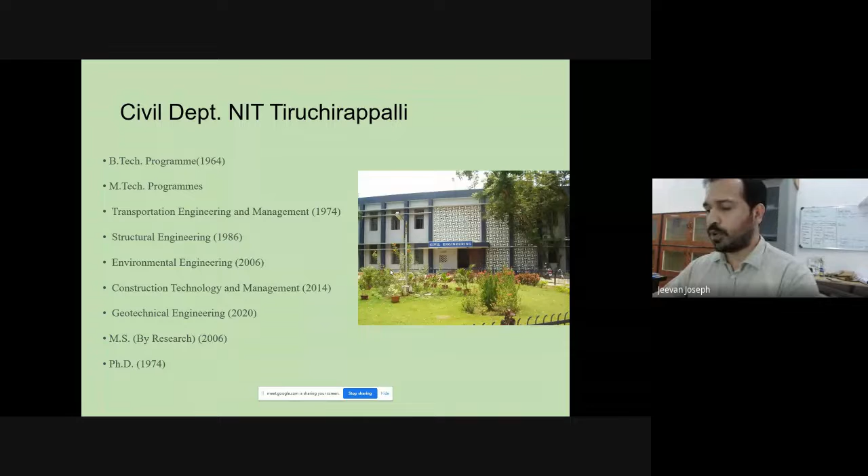Now, these are the research interests in which I work on these days. One is basically related to THMC models, thermo-hydro-chemico-mechanical models, and the response of soils. Apart from that, I also started working in the area of utilization and valorization of industrial byproducts. A couple of my master students are working in this domain. One of my students is working on developing sensors for geotechnical applications, particularly related to shrinkage stress measurements. The experiments are ongoing as of now, so mostly we'll be able to get some positive results out of that. Apart from that, I had worked on the area of energy geotechnics, but right now I am keeping a bit of distance.

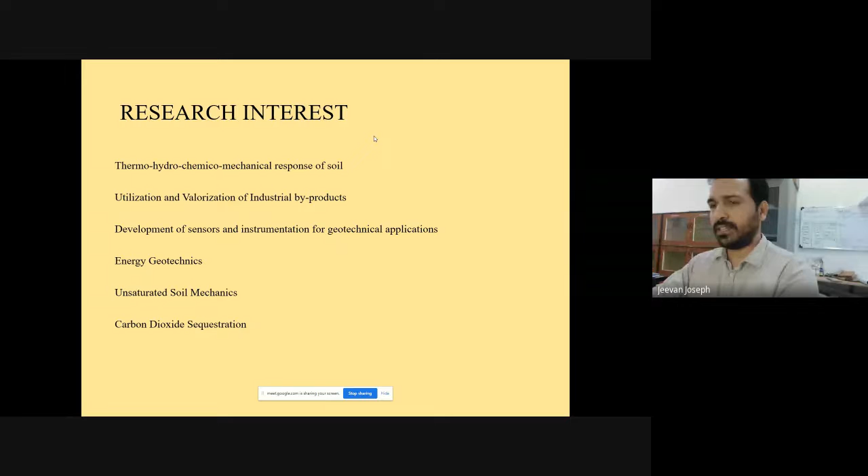Because a lot of funding is required to proceed with research in this particular area. So maybe in future, if I get some funding from some agencies, I'll be able to proceed with it. Apart from that, one of my students is working in the area of unsaturated soil mechanics. He's doing his PhD in this domain, trying to understand the rainwater infiltration in clay soils and how we can increase the infiltration capacity with novel methods. Apart from this, I started investing a few of my research themes into the carbon dioxide sequestration technique, which has also been found to be one of the emerging areas in which people work on.

Now, without wasting much time, I just want to give you a brief introduction about why exactly the gas transport through soil or any porous media is important for us. So when the term gas transport through any porous media comes, it is of course read along with the permeability aspect of the soil. As all of us know, the moment we try to define permeability, it is nothing other than the easiness with which any fluid can flow through a porous medium, irrespective of liquids or gases.

We always define permeability in terms of the ease with which fluids can flow through a porous medium. If we want to look closer, we also define a term called hydraulic conductivity, wherein we are particularly defining the flow of liquids rather than fluids in general.

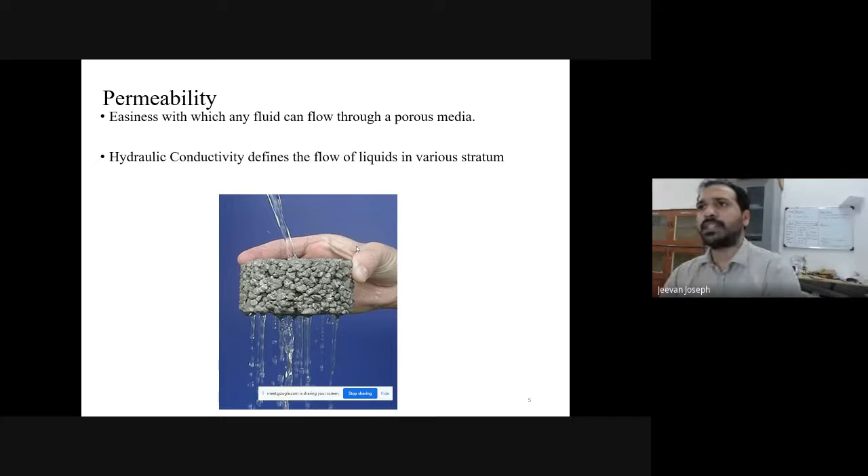In soil mechanics, we have plenty of applications related to determining hydraulic conductivity: the design of liner systems, earthen dam designs, geosynthetic clay liners, seepage analysis beneath dams. There are plenty of applications for determining hydraulic conductivity of porous media. There is also work being done on pervious concrete for pavements, so this area has many branches, but very little attention has been given to gas transport through porous media.

Now there is another interesting term, important to introduce, called intrinsic permeability. As we define it, there is a slight difference between the terms hydraulic conductivity and permeability.

When we denote the term permeability, it is basically a matrix property that one has to define. This relationship shows how we correlate hydraulic conductivity with permeability. Truly speaking, it's a function of the matrix property, or the intrinsic permeability term, denoted as small k. It is basically a function of the matrix property.

Followed by that, we have the fluid property, wherein we account for fluid density, acceleration due to gravity, and its dynamic viscosity. If you see as a whole, in laboratory conditions, what we normally measure, the hydraulic conductivity, is a function dependent upon both the matrix and the fluid character.

That is one reason why the unit for intrinsic permeability is given in meters squared, or L squared. If you take any soil matrix from the field and try to determine the hydraulic conductivity with water, with oil, or with some other fluid, you will realize that you get different coefficients of permeability.

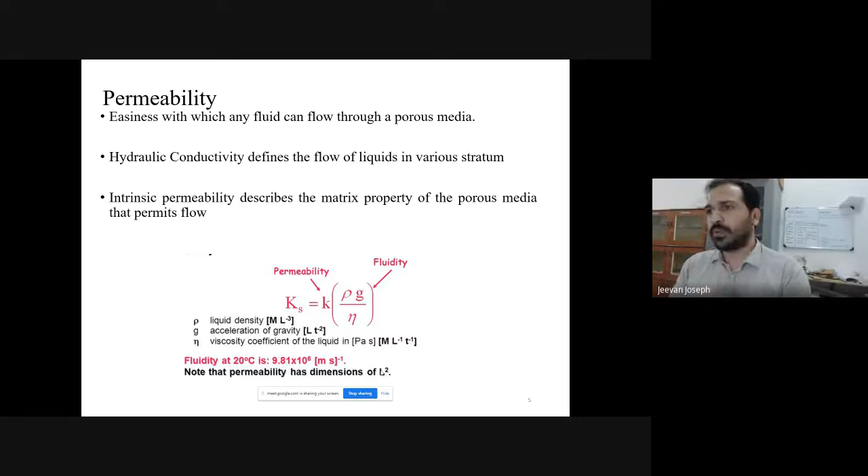That is why, when defining the property of any material, for example gravel, shale, various rock types, as well as soil types, we can define both its hydraulic conductivity and its intrinsic permeability. Normally we denote the unit of intrinsic permeability in Darcy, where one Darcy is somewhere close to 10 to the power of minus 12 meters squared.

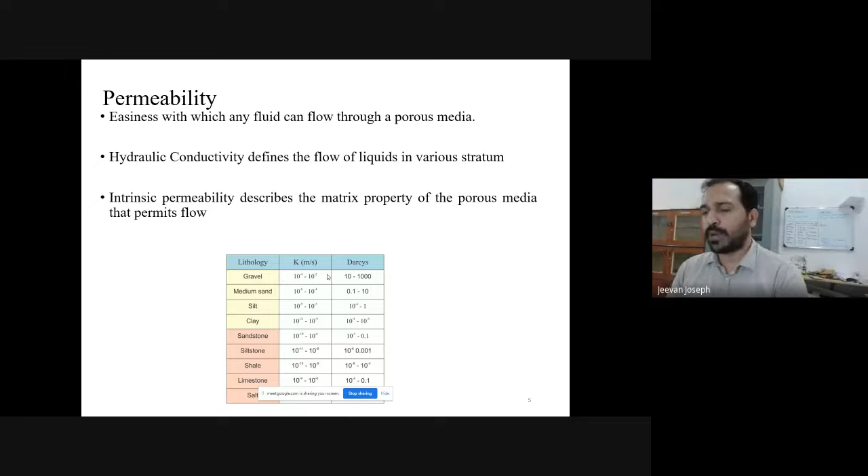The second column you see is a constant, because it is dependent upon the matrix property alone, whereas the first term in this column is dependent upon both the matrix property and fluid character. This is the basic difference between hydraulic conductivity and intrinsic permeability. This is important because whenever someone is defining the gas transport mechanism, we need to know how exactly we are going to measure it.

It is slightly different from how we measure hydraulic conductivity in the field, because the fluid which is going to flow is basically gases, which we are trying to do in the laboratory. In the coming slides, I will explain how exactly we can measure the gas permeability through a particular matrix.

At the same time, in order to evaluate them, we have the established relationship Kg, which is nothing other than the gas permeability or intrinsic gas permeability, which is basically Q mu L by delta PA. This is similar to the Darcy's equation used for hydraulic conductivity measurement, but here we have to compute the Q value, which is nothing other than the discharge.

Whenever a gas needs to flow, we have to make sure there is a pressure gradient, delta P, which is nothing other than the gas inlet pressure. Mu is the dynamic viscosity of the gas which is flowing. L is the length of the sample and A is the cross-sectional area. From this, we will be able to get the intrinsic gas permeability of the system. This is a derived formula from the Darcy's equation.

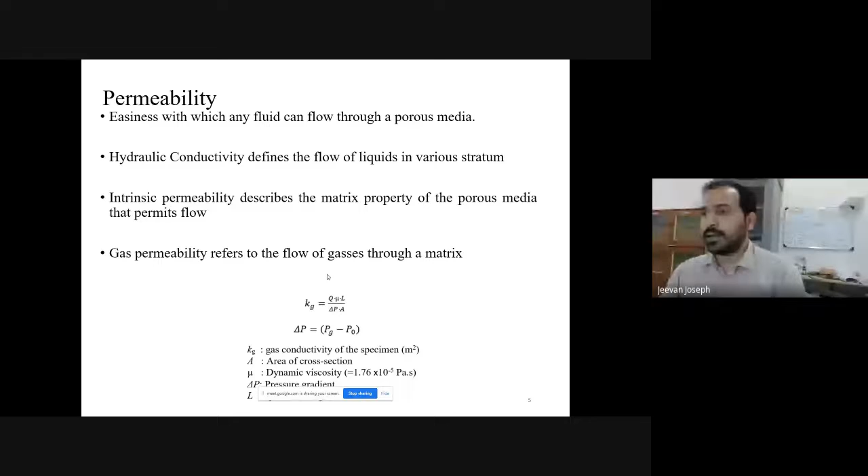As I have mentioned, here also we are particularly focusing on the intrinsic permeability, which is nothing other than the matrix property which has to be taken into account.

In hydraulic conductivity measurements, we mostly aim for a constant head test, because in conventional terms, in most of our laboratories we were following the constant or variable head permeability measurement techniques, in which we used to have a rigid wall through which we will be filling the soil, or maybe the soil brought from the field is transferred to this mold, and we used to perform the permeability test.

But one of the biggest disadvantages of this methodology is something called short circuiting, meaning, as I have clearly told you, permeability is nothing other than the easiness with which any fluid can flow. The fluid that you have taken for your study will always try to come through the least resistant path offered to it.

So in most of these cases, it has been noticed that the flow happens mostly through the peripheral sides, meaning the annular space which is available between the soil grain as well as the rigid wall which is present over there.

This effect will be more evident while attempting permeability studies with low porous media or lesser pervious systems like clay or silt, because the permeability value is pretty small for such materials. In such cases, if you attempt the permeability determination using a constant head or variable head method with a rigid wall cell, we can end up measuring values which are meaningless.

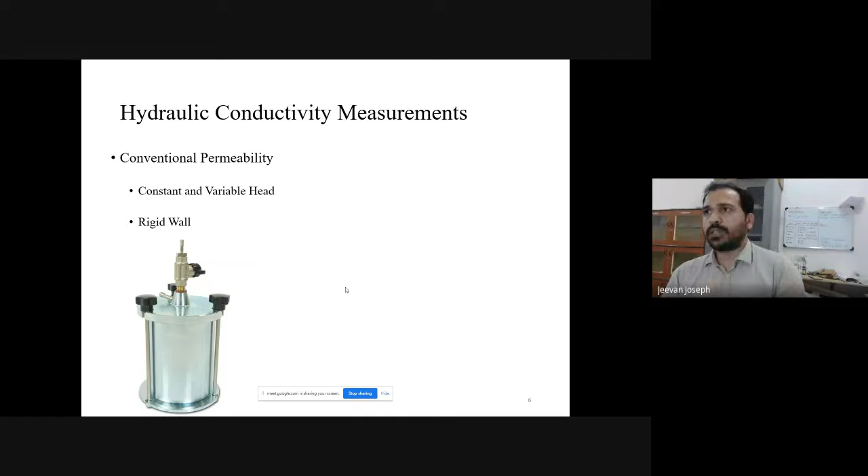So in order to cover that, most of you must be aware of this particular term called the flexi-wall permeameter. This is a device which will look similar to a triaxial cell. Unlike the conventional permeability mold, here we have a system in which we can apply confining pressures onto the soil sample which has been kept.

The sample that you prepare is similar to our triaxial sample of 38 mm diameter as well as 76 mm in height, which is prepared in rubber membranes. You can see the connections which have been provided for the fluid transport. The advantage we get is we can apply confining pressures.

At the same time, one of the biggest loopholes we have established in conventional permeability testing is that we won't be able to establish the saturation state. Majority of the time we assume the soil is saturated after continuously connecting it with a constant water head, maybe for 3 or 4 days. It was pretty difficult to make out the saturation state of the sample inside. That is one of the other disadvantages of going for a conventional permeability test, whereas here, we can vary the confining pressures.

At the same time, we can evaluate how much pressure is the pore water pressure that is getting generated inside the sample, and based on that, we can establish Skempton's pore pressure parameter B, and we will be able to know how much is the actual saturation state of the sample. So this is one of the advantages that we get while using a flexi-wall permeameter.

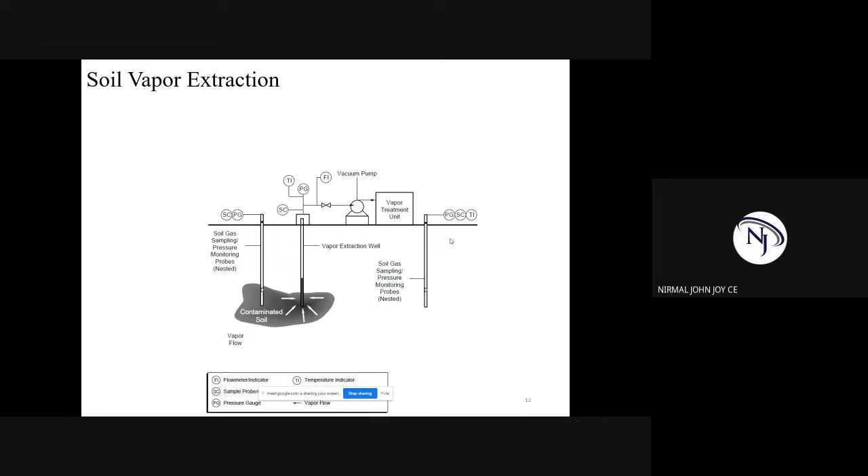Soil vapor extraction is a widely adopted in-situ decontamination technique. As you see in the image, we have contaminated soil at a particular depth beneath the surface. Rather than disturbing the complete system, we can plan to have a vapor extraction well, which is nothing other than a conventional bore well of 8 to 10 centimeter diameter. This is taken to the location at which possible contamination is established or expected.

At the same time, we will be applying vacuum pressure. This method is mostly or widely adopted for volatile or semi-volatile contaminants present beneath the soil. While applying the vacuum, because of the lowering of vacuum pressure, this contaminant changes its phase from liquid to gaseous phase, and you can extract it and treat this particular vapor outside.

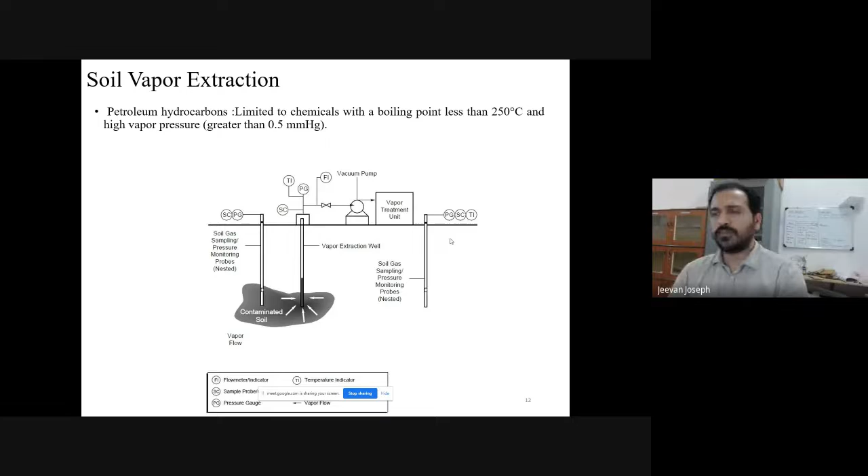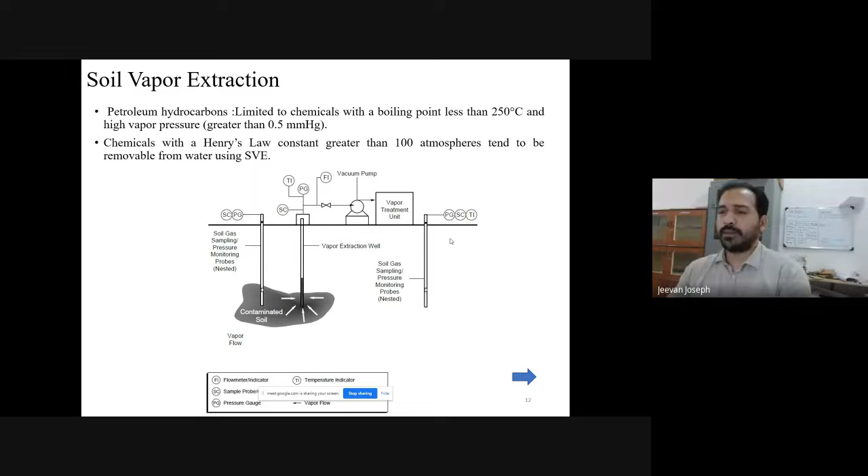Apart from this, in this method you have to have other sampling or monitoring wells near the contaminated zone to ensure that the level of contamination in the soil is being brought down. This method is widely adopted for decontamination of volatile or semi-volatile contaminants like petroleum hydrocarbons, whose boiling point is lesser than 250 degrees Celsius. At the same time, care has to be given to make sure its Henry's constant is greater than 100 atmosphere. Only then can we ensure that the soil vapor extraction technique applied to a particular problem is going to be effective or not.

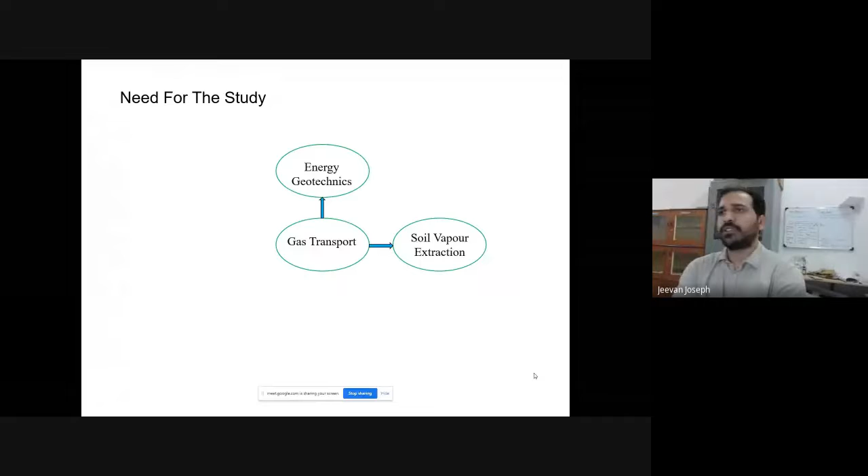Proceeding further, the next example I would like to give is energy geotechnics. The initial example I gave was related to soil remediation. Now, how exactly is the gas transport mechanism important for energy geotechnics? Today I will take you through one of the classical ways by which we used to proceed for gas extraction beneath the ocean bed. As you all know, the majority of conventional gases are extracted beneath the ocean bed at larger depths of the order of 600 meters beneath the seawater level.

At the same time, studies indicate the presence of something called gas hydrates. These gas hydrates are materials similar to ice, but their properties are completely different. They are ice-like structures created because of the excessive high pressure and low temperature present beneath the ocean bed.

What happens beneath the ocean bed is that once gas is generated, it tries to migrate upward owing to buoyancy and its lower density. But through cracks or faults, as it traverses upward, it reaches a particular zone where a critical pressure and temperature is available to transform it into these gas hydrate cages. So this is what exactly is happening.

If you closely examine why the temperature is lower at the ocean bed, at the surface of the ocean you can encounter temperatures of the order of 30 degrees Celsius, but sunlight cannot proceed for a larger depth. So at depth in the water you can encounter temperatures of 0 to 3 degrees Celsius. But again, there is an increase in temperature, and it can go up to greater than 700 degrees Celsius once you reach the zones of the mantle.

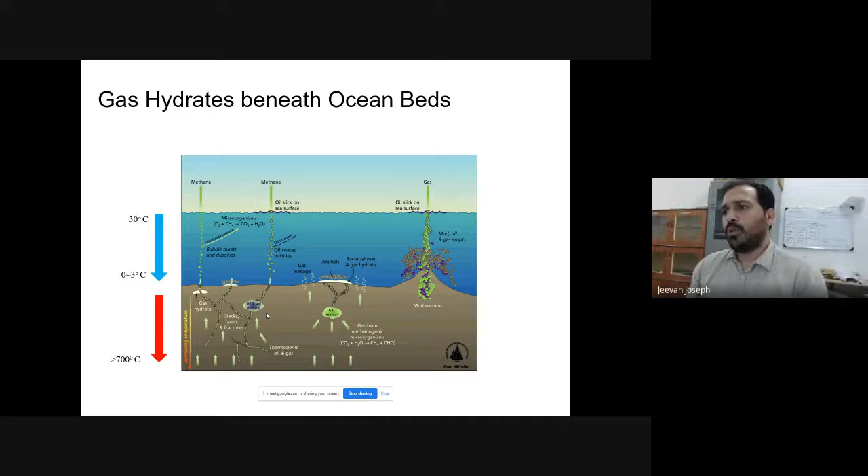These gases are mostly methane, present beneath the ocean bed. When we take a closer look at these gas hydrates, the methane molecules that come up get surrounded by water molecules. The attraction by which they are surrounded is not due to any chemical bonds being generated; it is purely based on van der Waals force. With external high pressure and low temperature, such a cage is formed. So truly, it's an interaction between the guest, which is methane, and the host, the water molecules surrounding it.

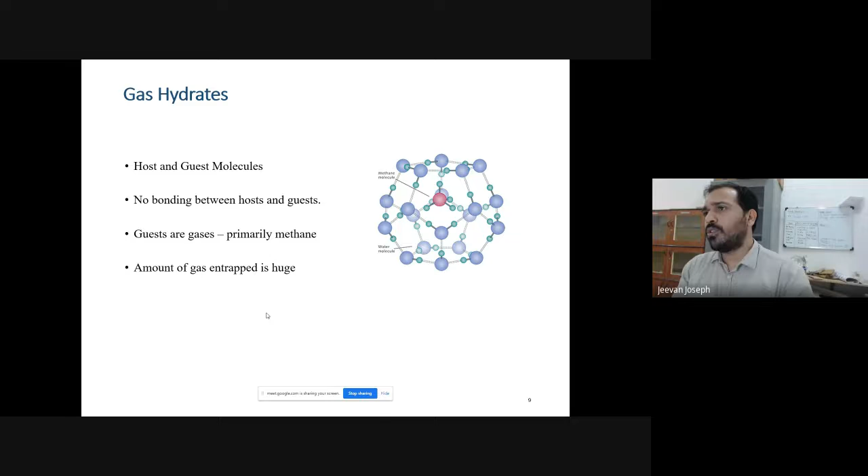At the same time, regarding the potential of methane present in the system, it has been found that the amount generated or present in hydrate form is almost 10 times the order of conventional gases available. Just imagine the potential of methane deposits beneath the ocean bed — almost 10 times, which means we need not worry about the next century as far as these deposits are concerned.

If you quantify the amount of gas present, it has been computed that 1 meter cube of methane gas hydrate, if extracted, is able to liberate 164 meter cube of gas. As I told you, it is under immense pressure. I can give you the example of a normal carbonated drink like Pepsi or cola, where excessive pressure of gases is applied inside the system and a cap is put on top. The moment you open the lid or cap, the gases start escaping. So truly speaking, it's a condensed phase of gas.

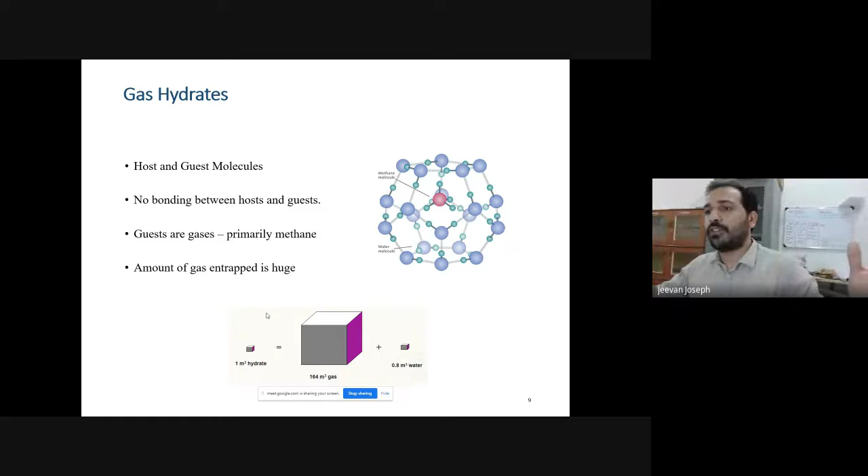The gases are present inside the liquid. Because of that particular high pressure and lower temperature, it has converted to a form of hydrate. The same way, if you take a 1 meter cube of hydrate from the ocean bed, when you bring it to normal temperature or atmospheric pressure conditions, it will expand to 164 meter cube of gas as well as 0.8 meter cube of water. So we can think about the potential.

Now this is a graph which shows the pressure temperature relationship, which is essential for hydrate formation. The temperature is given in Kelvin. As I have told you, it is not mandatory that the temperature of the liquid has to fall below 0 degrees Celsius. If the pressures are more, the temperature requirements are more or less of the order of 3 degree or 5 degree in order to make sure that hydrate crystals form.

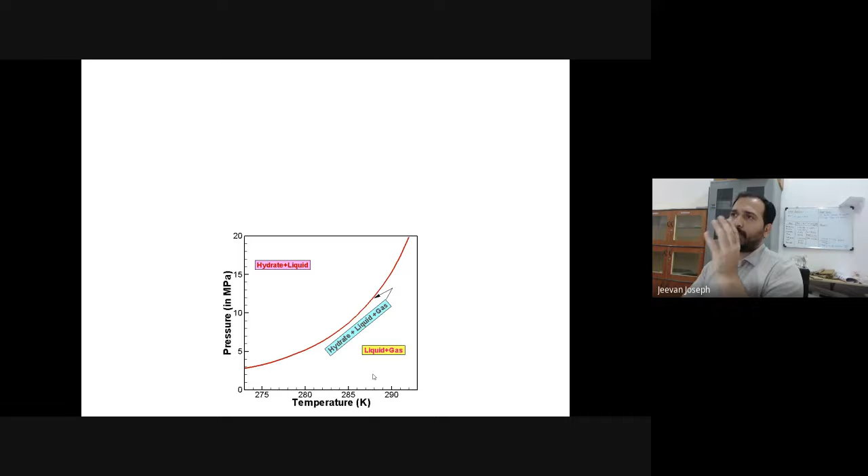Now, in order to have an understanding about where exactly these gases are generated, most of the time they are thermogenic or biogenic in nature - the methane which is generated beneath the ocean bed. It has also been detected that in the offshore regions of KG Basin, the Krishna Godavari Basin, we have huge deposits of methane gas hydrate, and ONGC is doing R&D work for extraction of these gas hydrates, for solving the energy crisis faced by the country.

Now, the methane which is generated is actually biogenic or thermogenic. Thermogenic is nothing other than the excessive temperature which is available near the mantle portions - all the organic deposits that have formed get converted into methane. Similarly, there are microbial colonies present beneath the ocean bed which eventually convert the organic waste, or the organic sediments, into the methane which is generated. So the methane origin can be biogenic as well as thermogenic.

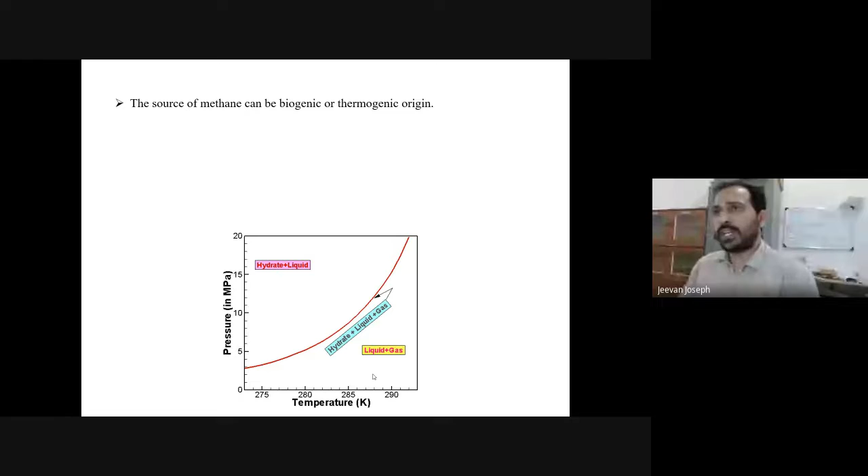Now, at the same time, if somebody is planning to take it out, we have to play with its thermodynamic conditions - either play with the temperature or play with the pressure. Either you apply some sort of vacuum so that the pressure is reduced, so that it can dissociate in the in situ condition, so that you can think of extracting it. Or the second way is, you can think of increasing the temperature beneath the ocean bed, so that its thermodynamic condition is being altered. So once you play with these thermodynamic conditions...

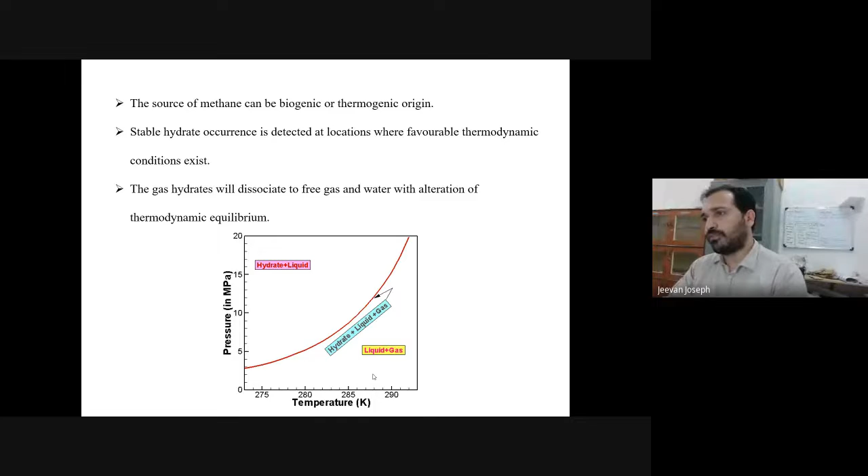Once you separate them, again, it's a play between how exactly this gas is able to get transported through the sediments present beneath. That's why the gas transport beneath the ocean bed is of significant importance. But there are plenty of geotechnical challenges when you think about going for the extraction. Though it appears to be quite charming as far as its potential is concerned, there are plenty of challenges one would face.

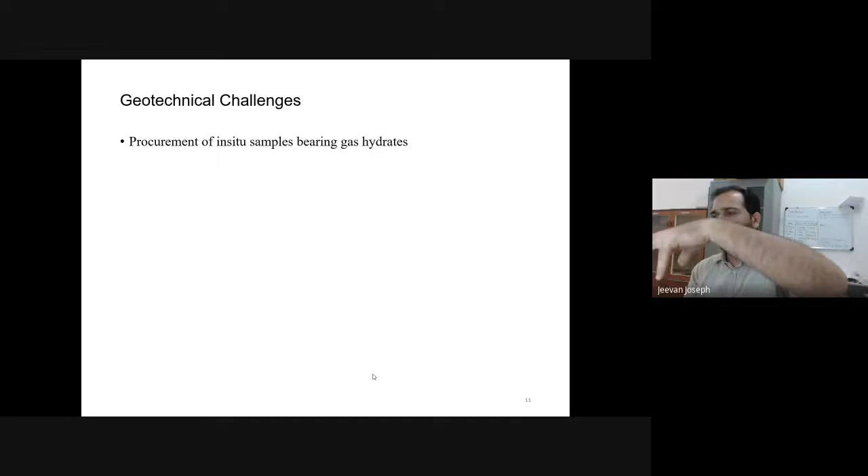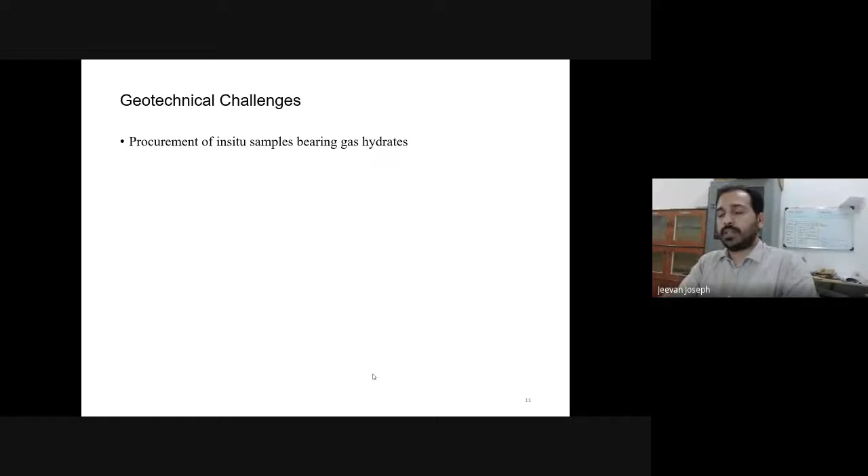The first and foremost thing is the procurement of samples. Maybe for experimental studies, you can think of taking some hydrates from the location. We can think of pressure core sampling techniques, wherein you can maintain the pressure conditions existing in that particular condition, to take it. But in a larger scale, if you are thinking about extracting it, it is going to be a really big challenge.

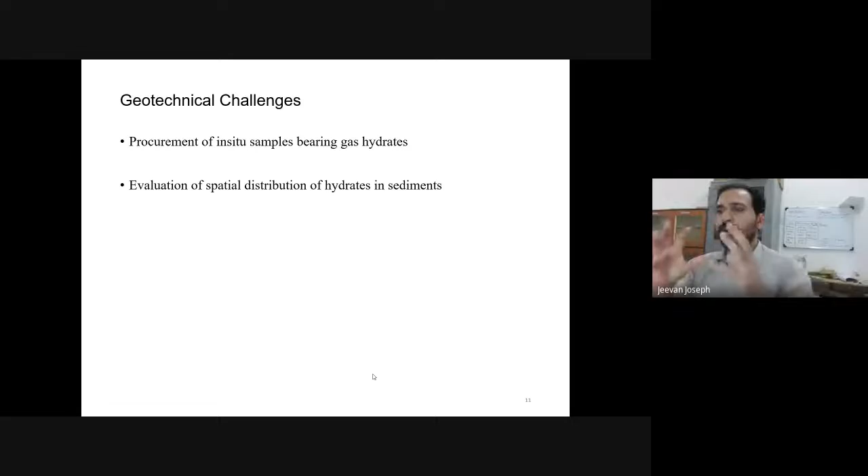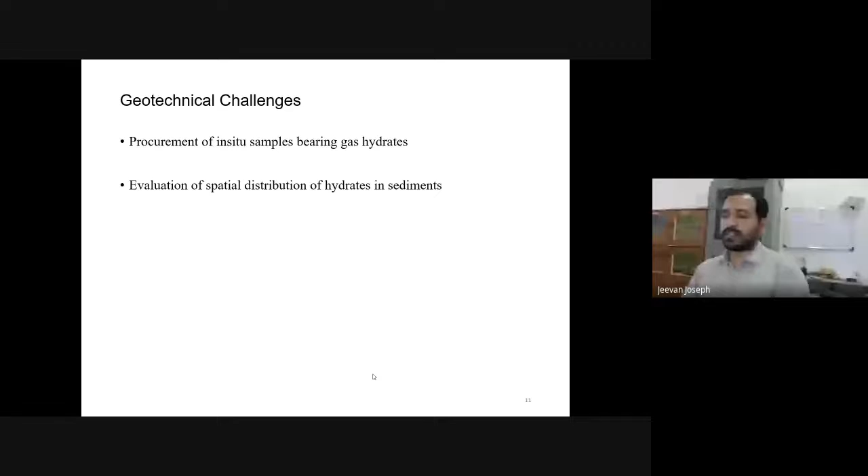And apart from that, we are also not aware of the spatial distribution, how exactly these hydrates are present beneath the sediments. As I have told you, there are locations in which it will be available in centimeter cube dimensions, whereas there are certain locations at which you can find them in meter cube of size. So the distribution of hydrates is very random, not like conventional gas reserves. Unless we have a deep understanding about how spatial distribution is happening beneath the ocean bed, its extraction is going to be a big question in front of us.

Now, apart from that, simulating its conditions in the laboratory is also a challenging task. Simulating all these high pressure conditions, going up to 5 megapascals, and maintaining a temperature of the order of 3 degree or 4 degree for creating a hydrate inside the sample in a laboratory situation itself is a very challenging task.

At the same time, please remember that we are trying to extract something which is existing in a solid phase beneath the sediments. So the moment you play with it, there can be variations in the shear strength on which this rig is going to rest, or else in the seabed itself we can expect a lot of changes related to its shear strength.

Once you extract or dissociate them, more gas is evolved. What will happen is more pore pressures will be generated, more buoyancy will be generated, its shear strength will be reduced, effective stresses will be reduced. So such complications are also expected once you think about extraction at a commercial level.

At the same time, you cannot target extraction of these gases from all types of sediments. You have to be very clear about the type of sediments we can focus on. On the Japanese coast, back in 2011, in the expedition program they conducted, they found deposits of gas hydrates in coarse grain sediments, mostly sandy sediments. Whereas in the KG Basin, where we have determined the presence of hydrates, they remain in clay sediments. So the gas permeability is of significant importance while thinking of extraction, because if you find hydrates in clay sediments, extraction is going to be really difficult as compared to coarse grain soil.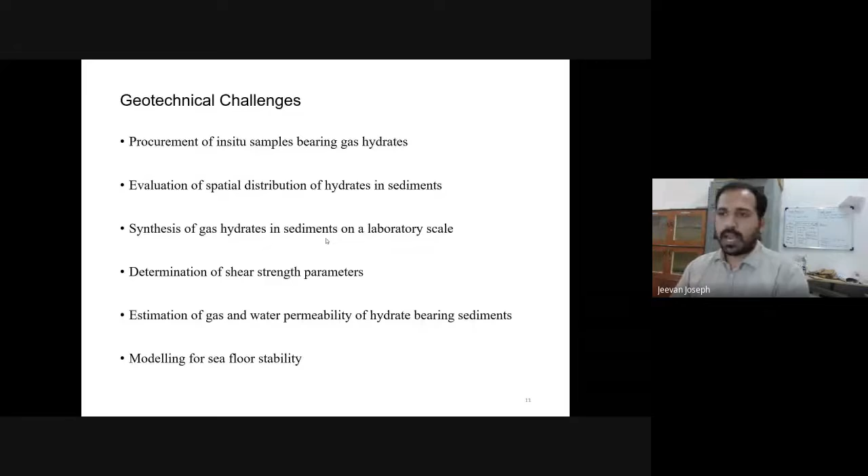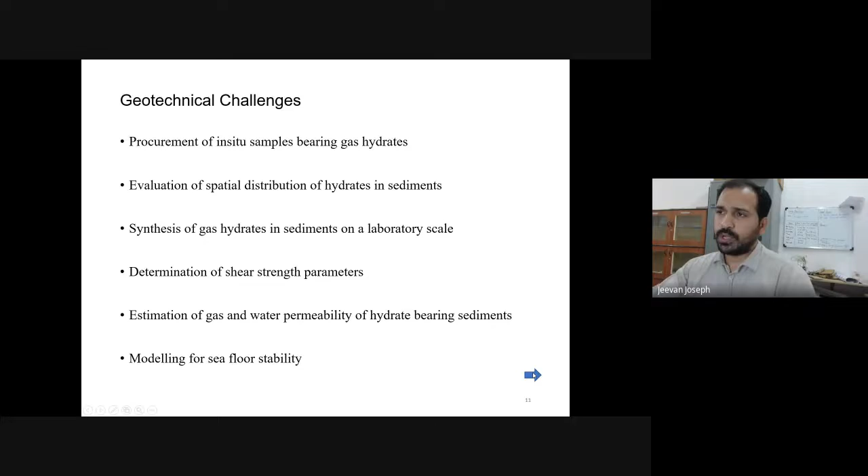So our focus is also on trying to get a field in which we'll be able to extract them in the easiest manner. At the same time, there is a significant need for modeling seafloor stability, because as I have mentioned, you are going to change the phase of something which was solid in nature into liquid as well as gas. So we can anticipate stability issues in the seafloor while going for its commercial extraction. These are a few of the techniques and aspects related to why exactly the gas transport mechanism is pretty important as far as unconventional energy or gas extraction is concerned.

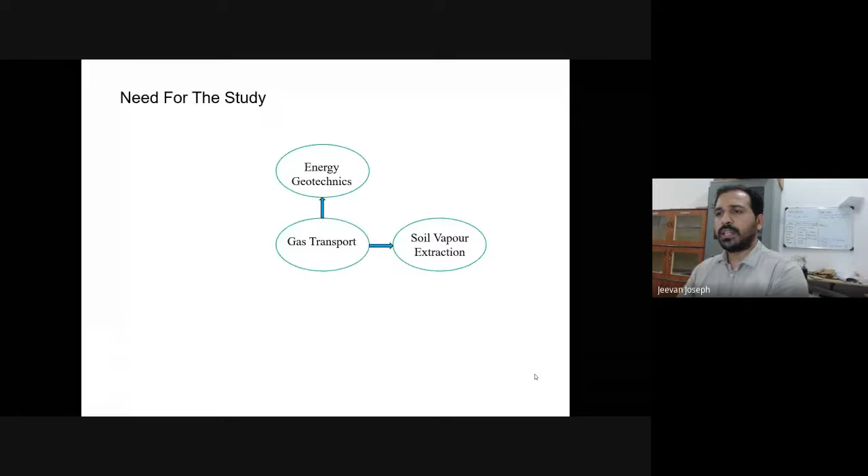The next aspect is nothing other than landfills. Many of you would already be aware of why exactly gas extraction is of importance here. When we think about landfills, the days are gone in which people thought of having dump yards. These days people go for engineered landfills in which they have multi-layer geosynthetic materials placed beneath. Apart from that, they have compacted clay layers placed beneath, of the order of almost 45 centimeters to 2 feet thickness, in order to ensure that the leachate generated from the landfill is not contaminating the groundwater.

At the same time, we have to have multi-layers of geotextile, provisions for collecting leachate, and provisions for collection of gases. This is where this study is of importance for us. Many times we have to make sure there are pipe networks placed beneath the landfill for the collection of the landfill gases that are generated. Please don't get carried away by the image - there are pipe networks provided even at the top surface before the cap is provided. So we will have plenty of pipe networks running throughout a landfill for the collection of methane gases.

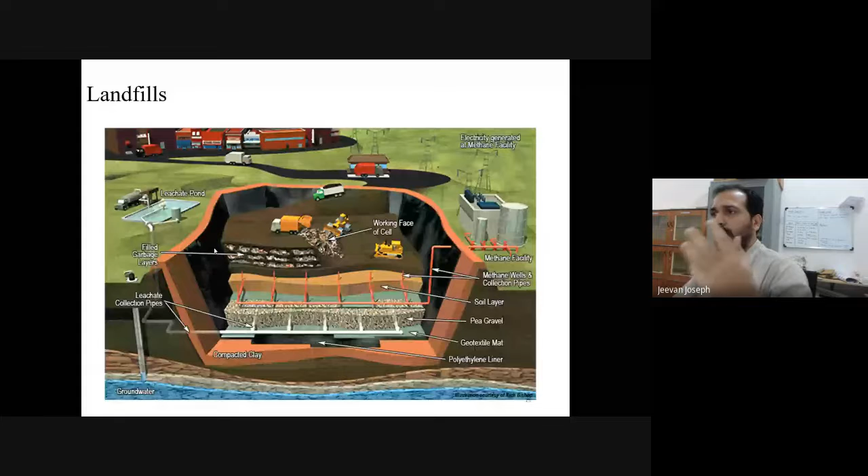Now, if the amount of gas generated is in enormous quantity, we can think of producing electricity from this. At the same time, if the quantity is not surplus enough, normally people used to just burn it off. Because methane has been found to be almost 21 to 22 times more potential to harm the ozone layer as compared to carbon dioxide. So people always burn off methane if it is not produced in surplus quantity, so that they can think of getting some value addition from that.

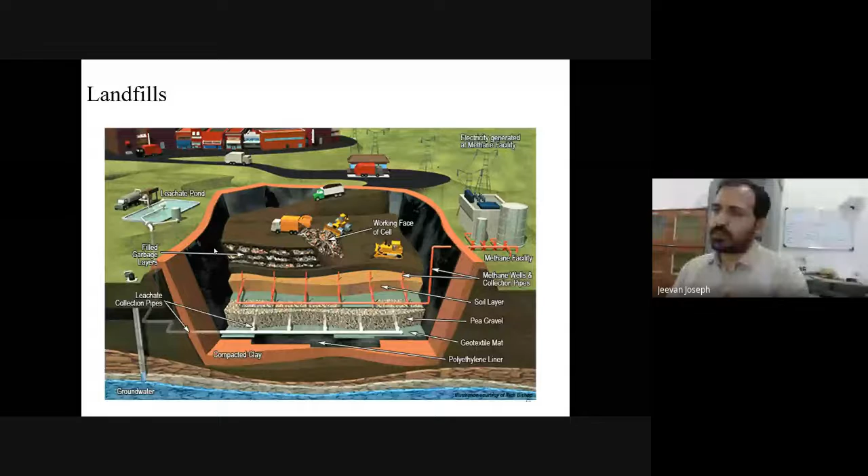At the same time, we also have the leachate pond which has been created. Now, to increase the methane gas generated from a landfill, there is a new methodology which has evolved, called the bioreactor landfill.

Unlike the engineered landfill, a bioreactor landfill has an additional provision for circulating the leachate. As you can see in the image, there's a provision for this circulation. Once leachate circulation is ensured, it will accelerate the disintegration process, because accelerated disintegration of waste inside a landfill requires ambient temperature, pH conditions, water content, and the presence of microbes. While recirculating the leachate, you can check the quality of the leachate coming out of it.

You can amend or vary the property, and add microbial colonies to it if required. Based on that, you can keep recirculating it. The advantage is that there will be quick disintegration of waste, and at the same time, methane production will also be enhanced.

This is another reason why we needed to go for gas transport studies. The measurement of gas transport in a landfill is quite complex because of the heterogeneity of the waste being dumped. It is unlike sediments or normal soil. Majority of the time, pipelines kept inside the landfill get choked because of the wide range of properties the waste possesses. This is one of the biggest challenges faced when measuring gas transport mechanisms or gas permeability.

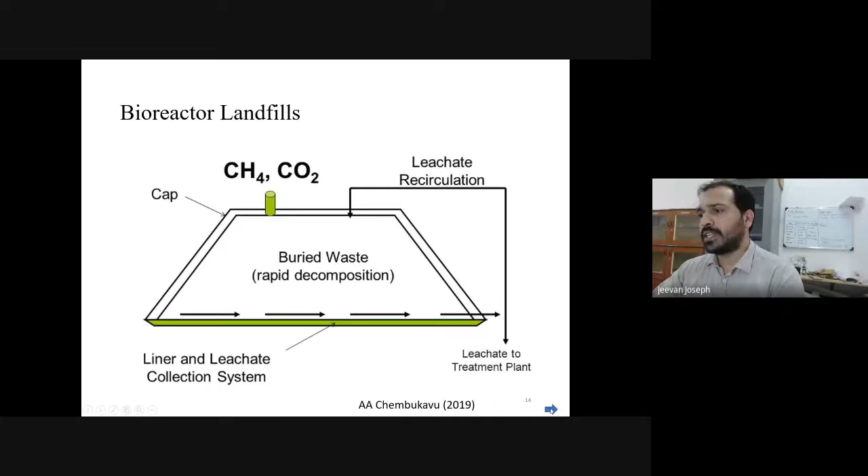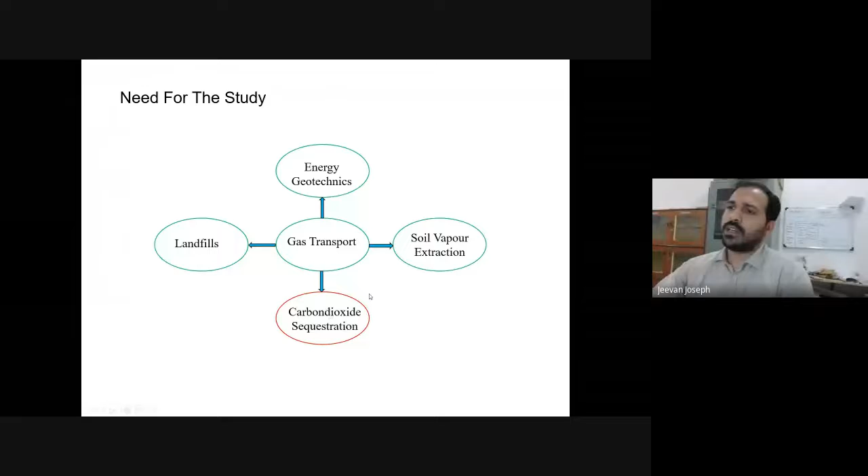Now, one more application I'd like to discuss is a novel area many people are working on these days, related to carbon dioxide sequestration. This is one of the final applications I'd like to draw your attention to. If not in India, in most of the Western world they already practice carbon dioxide sequestration. In simple words, the way they proceed is by figuring out how to transport or sequestrate, meaning store, carbon dioxide beneath Earth's surface.

As we are aware, there is a huge demand for energy these days, and we depend mostly on thermal power plants, from which we encounter flue gases that constitute mostly carbon dioxide. So what has been attempted is that this carbon dioxide coming out of power plants is injected back inside the earth, even a few kilometers deep.

There are certain aspects we have to take into account. We have to ensure it is not leaked, so it is mandatory to have impermeable confining layers to ensure non-leakage of the gas. At the same time, we have to ensure there is no geological fault or fold, since cracks present inside the system might lead to leakage of gases.

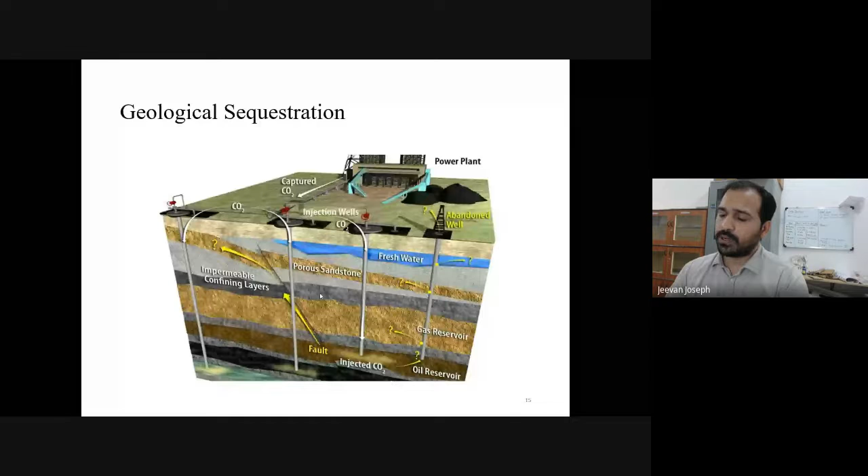This area is emerging, and though there are plenty of works carried out, there are also successful implementations of geological sequestration of carbon dioxide projects. People attempt this method in the field as well as in offshore regions, where if caprock and impervious strata are available, they inject the carbon dioxide so that eventually it gets converted or solidified, becoming part of the soil.

They target most gas reservoirs that are getting depleted. Majority of oil and gas reservoirs have huge holding capacity, so these studies are mostly attempted at locations where oil or gas reservoirs are getting depleted, and it is mostly preferred in saline formations. In fact, sequestration of carbon dioxide is also being attempted in coal bed seams.

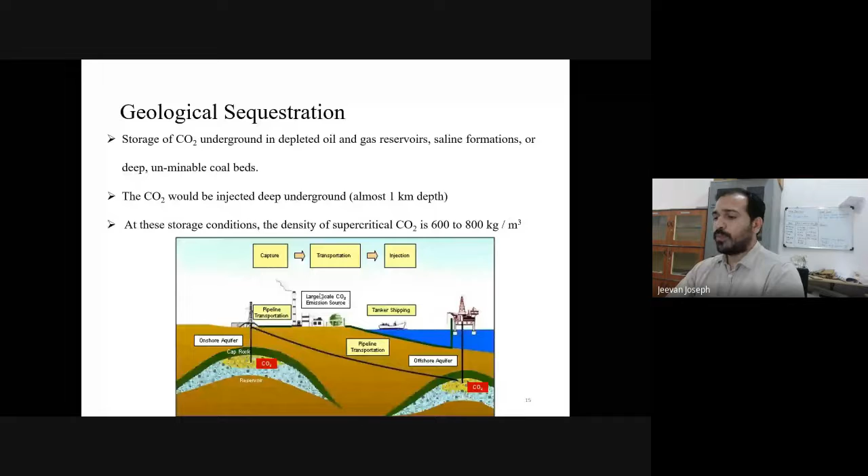So many times we can also anticipate certain seismic activity, local seismic activity, if the pressures are on the higher side. Now there are various parameters that will affect the success of a geological sequestration technique, like the porosity of the rock, the permeability, the absence of geological formations like faults, as well as the geometry of rock layers.

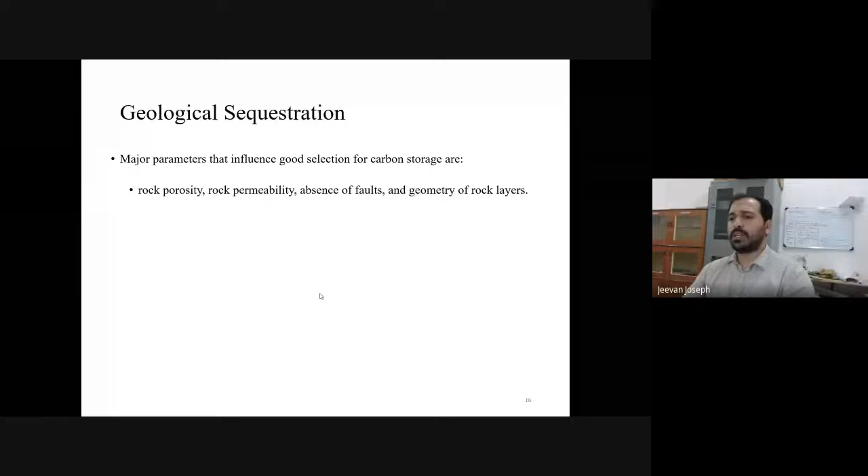Actually, we cannot think of adopting this method if an impervious strata is not present. Unless we have an impervious strata, this method can prove out to be a failure.

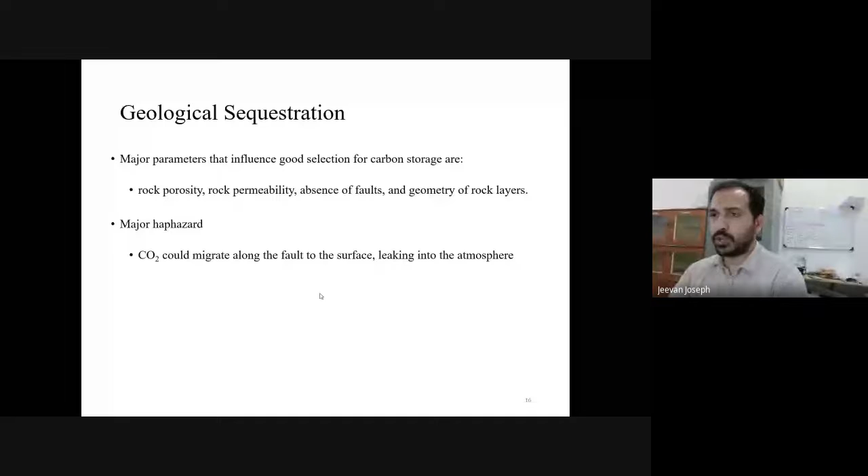And at the same time, as I have mentioned before, if there is a leak, what will happen is it will come out of the surface and go back to the atmosphere, making the method an utter failure.

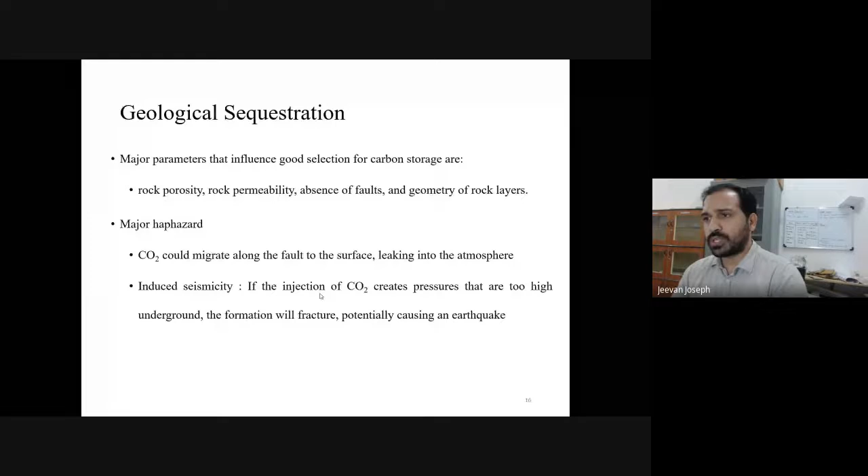Similarly, it can also induce seismicity, because we are injecting carbon dioxide at very high pressures. So it might result in, if there are weak strata present beneath, the formation of fractures, and localized quake motions can also get induced because of such activity.

Now, hereafter, I would like to drag your attention to certain factors that affect the flow of gases. So far, we were discussing, I was just giving you a few examples in which it is absolutely essential to measure the gas permeability through porous media. Over here, I want to discuss the various factors that are affecting the flow of gases and the various methods by which you can measure the gas transport.

Now, in this figure, as you see, this is basically a cross-sectional view of a porous media. Normally, whenever you have any porous media, you'll have transport pores. Transport pores are nothing other than the pores which will take part in the fluid conductivity or gas conductivity. At the same time, we can also see dead-end pores. Dead-end pores are the ones which are not interconnected to transport pores. Once it reaches that particular location, thereafter the flow is not ascertained.

Similarly, there are isolated pores. These isolated pores are nothing other than the pores that are generated between soil grains where there is no access of liquid at all. So these are the three ways in which you can see the pores in any matrix.

Now, there is something which is defined as the critical pore. So critical pore is nothing other than the least diameter which is available. 2r_cr is nothing other than the least diameter which is available.

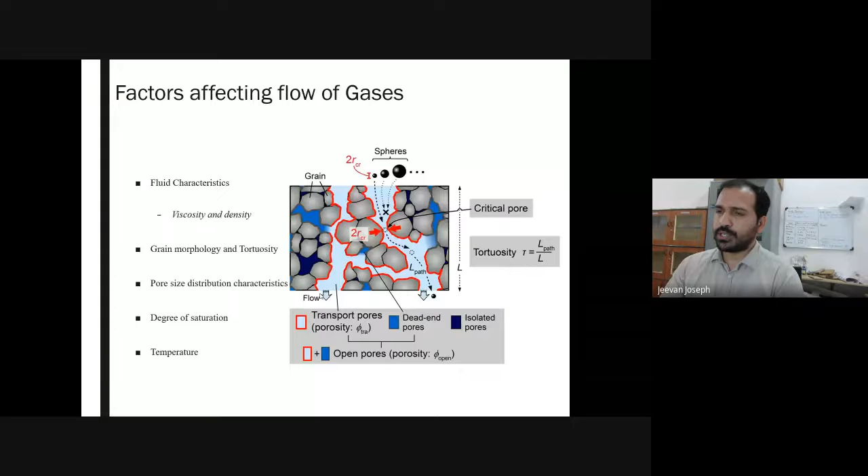Now in this particular aspect, I'd like to drag your attention towards the method called mercury intrusion porosimetry, which would be pretty new for many of you. This method is a sophisticated technique by which you can compute the void ratio, the porosity, the diameter of the pores, and so on.

So in this, how we proceed is we take a matrix of soil inside a glass tube. After that, we inject mercury at a particular pressure, starting at different pressures. Now what happens is, mercury being a non-wetting fluid, it will start getting split up.

At lower pressures, it will enter into the larger pores. When you apply more and more pressure, when you increment the pressure, the mercury will get split apart and start entering into the finer pores. So this non-wetting capacity and the high surface tension capacity of mercury has been utilized for quantifying the pores that are present.

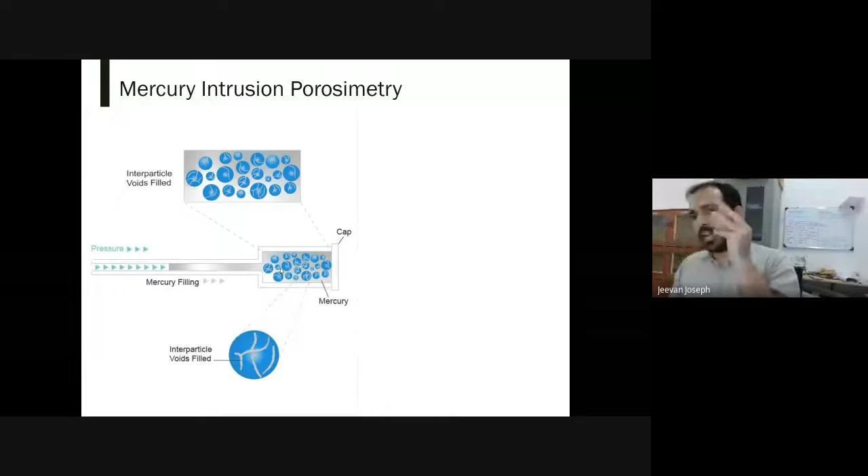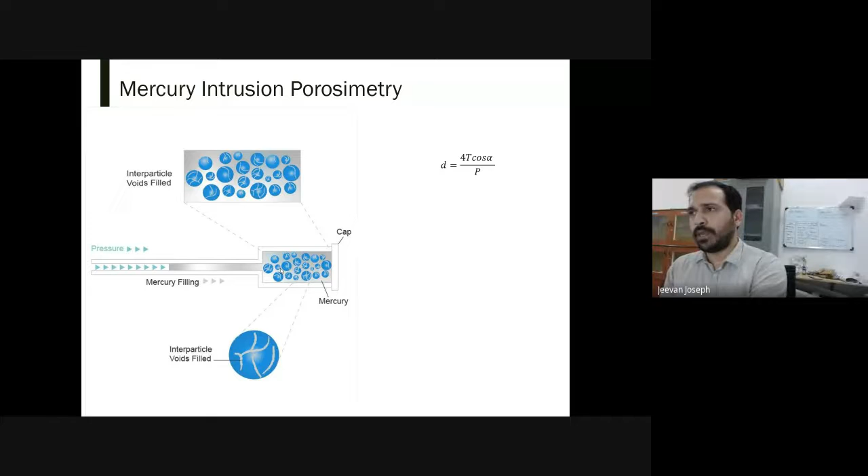The simplest explanation or principle by which it works is basically the Washburn equation, 1921, given as D equals 4T cos alpha by P, wherein D is the diameter of the pores, P is the pressure at which we are filling the mercury inside the system, T is the surface tension, and alpha is the contact angle generated between the mercury and the material for which it has been measured. Mostly for soil, it has been found that alpha is somewhere close to 140.

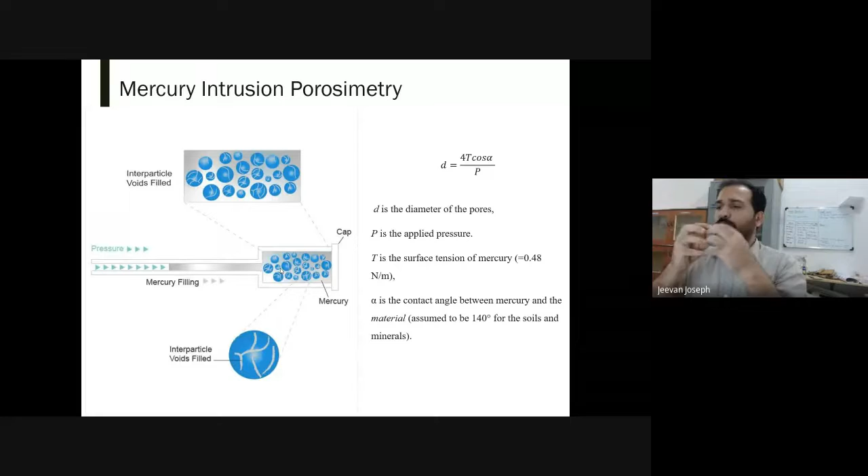Using this particular relationship in this instrument called MIP, at lower pressures the mercury will start intruding into larger diameter pores. Once again, as you start incrementing the pressure, you can see the mercury will split apart, entering into the finer pores. The advantage of this method is that you will be able to quantify the volume of mercury which has intruded.

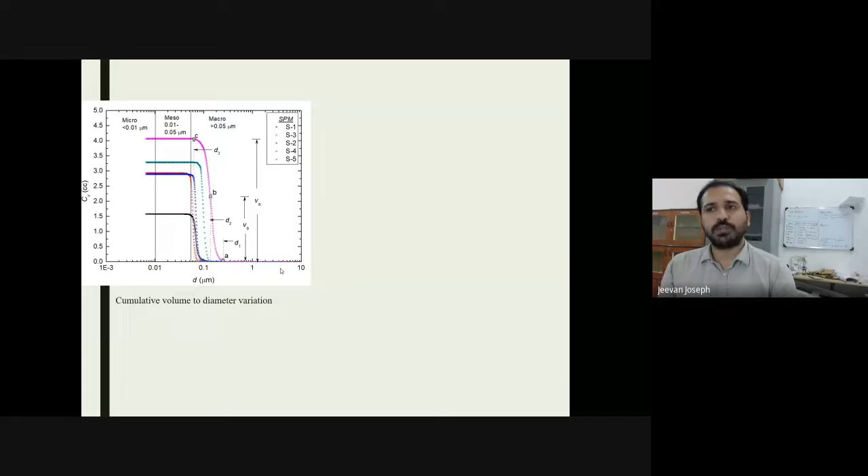I've just given you one of the graphical depictions of how exactly it works. Here there are 5 samples which have been taken into account, of different diameters. So what exactly happens is that when you start operating with the mercury intrusion porosimetry technique, mercury will start intruding from the larger pores.

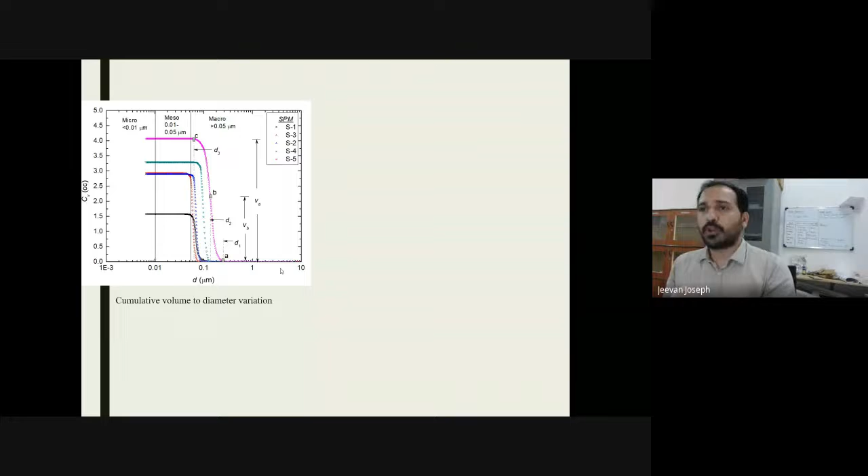As you see inside the image, starting from 1 or 0.1, slowly the mercury is intruding inside the system. The volume of mercury can be measured at the inlet, from which you can make out the cumulative volume of mercury that has intruded inside the system. From this, it becomes easy for us to quantify the void ratio or the porosity, because we are completely aware of the incremental increase in volume of mercury inside the pores.

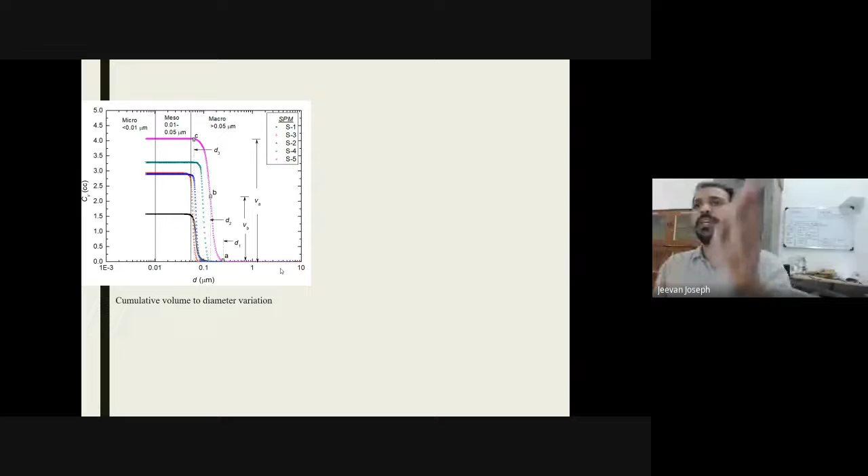So finally, what you can see over here is, in all the 5 different samples, after somewhere around 0.05 or 0.06, it is becoming asymptotic, meaning that there are no pores finer than that particular dimension.

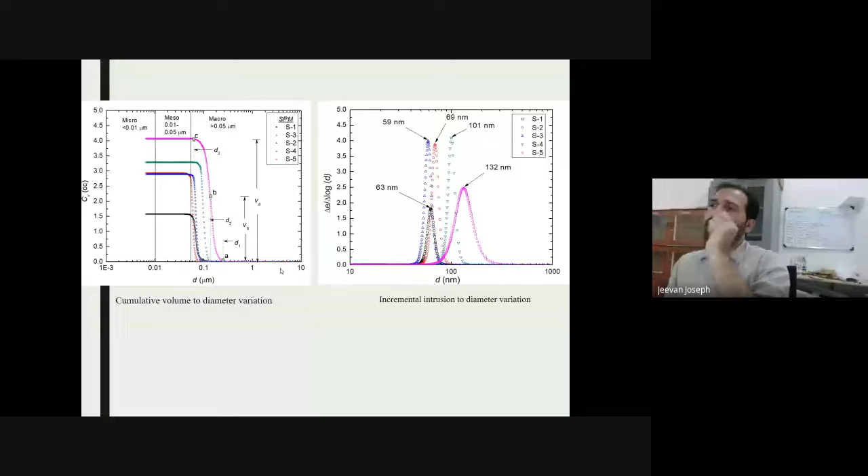Similarly, we can also derive one more graph based on the incremental intrusion of mercury inside the system, del E by del log D. This graph can also be obtained from a mercury intrusion porosimeter. If you have any porous media, you can do this test, and from it you'll be able to establish the mean pore diameter.

The mean pore diameter is nothing other than, in this particular diagram, say for example S1, it is showing a diameter close to 63 nanometers, which means the majority of the pores in that particular porous media has a pore diameter of the order of 63 nanometers.

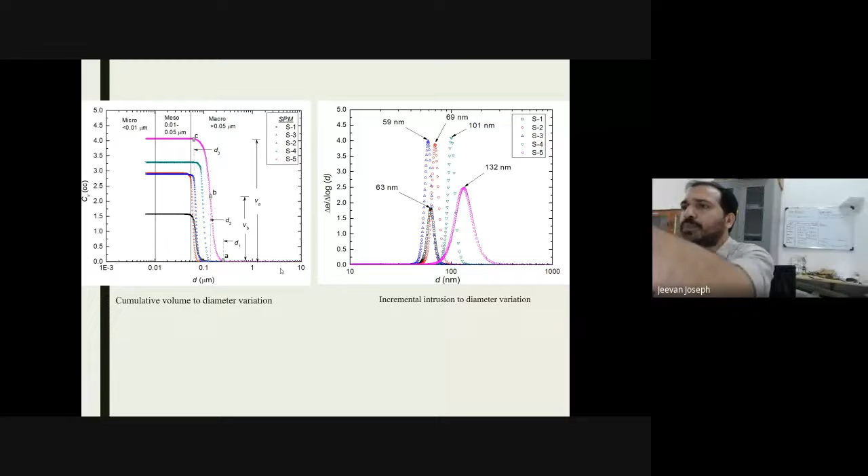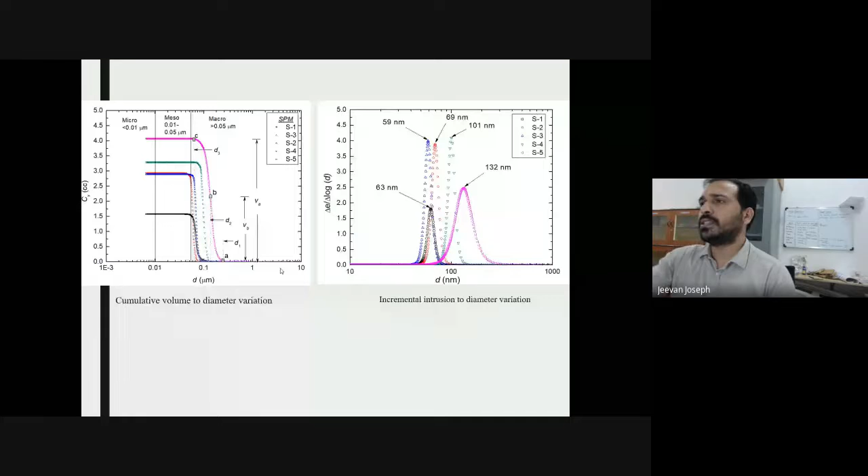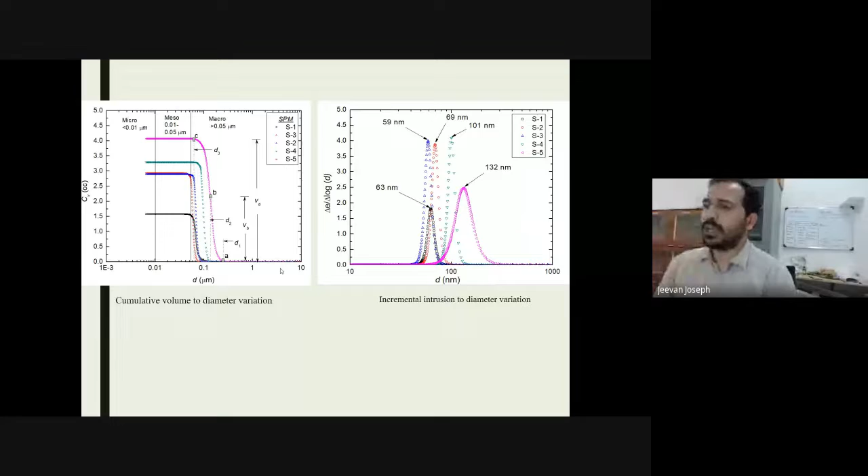Similarly, there are other samples which have also been taken, and you can see the distribution of pores is more or less homogeneous. I would call this a monomodal distribution of pores, as reflected in this image. Whereas in most clays, in compacted clays and so on, we often see bimodal distribution of pores, with two different peaks. But these are basically artificially prepared materials. In these cases, we normally encounter pores that are monomodal, meaning the majority of the pores correspond to a single diameter.

So please keep in mind, these are gadgets available in the market which can be utilized to quantify its porosity, void ratio, diameter of the pores, or any sort of pore characterization using these particular techniques. Now, this is what I wanted to highlight related to the saturation state.

Many times, we will have a system which is partially saturated, and when you have a partially saturated system, replacing the existing fluid with the fluid that is flowing may not be possible. So whenever we have gas transport or oil or anything being transported through a porous media that is saturated with water, the oil or gas flowing may not be able to get the complete diameter that is available.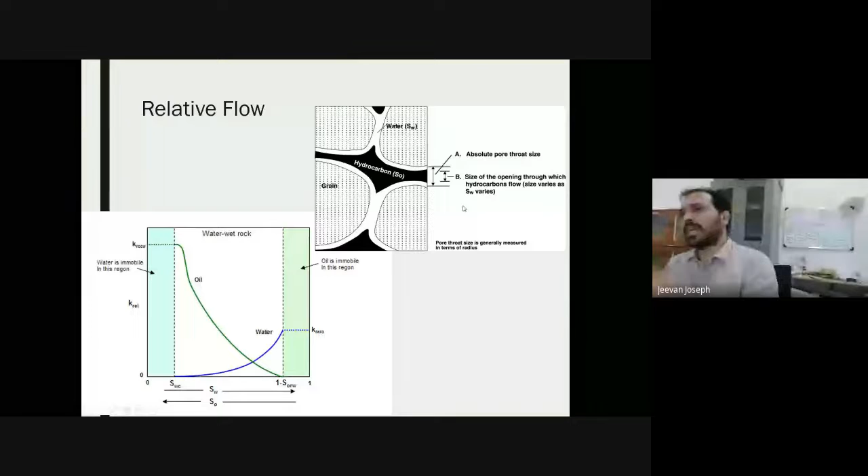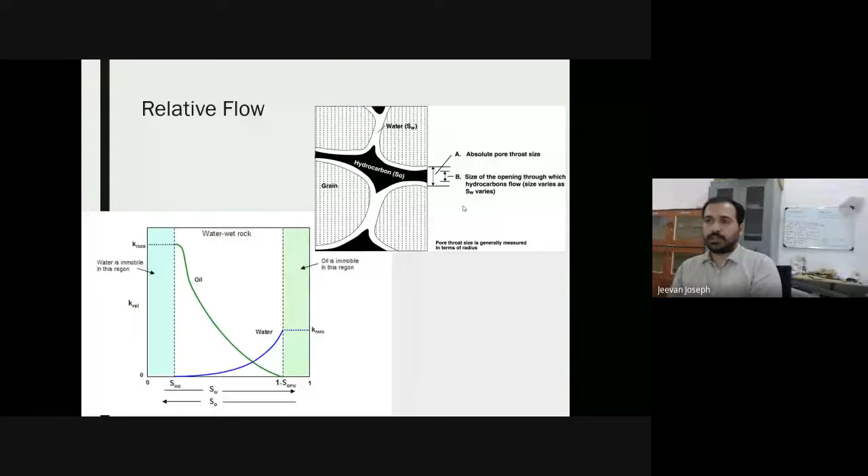Though you will be quantifying the porosity of a system using MIP or the best possible tool, the absolute pore throat might be A, as you see inside one of the images. But due to the presence of a layer of water around the soil grains, the hydrocarbon or gases trying to flow will only get a reduced diameter of the order of B. This is how the saturation state of a material influences the flow of other liquids, which is where the relevance of the relative flow of gases through sediments becomes pretty significant.

Now hereafter, I'm just giving you a brief introduction to a few of the methods being developed for measuring gas permeability in porous media. I'm taking two examples, one that can be performed under normal temperature conditions, and one at a frozen temperature.

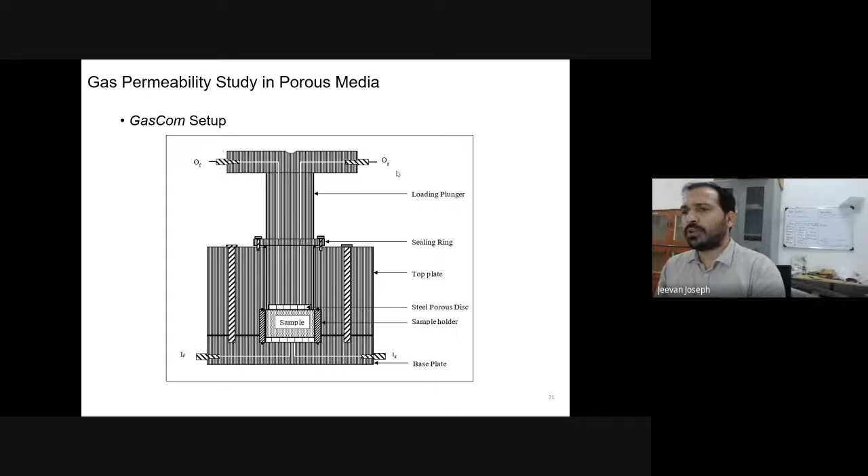You can use carbon dioxide, nitrogen, normal air, or any gases that come to you for the study. The outlet connections are available for taking the gas out of it. Unlike in a conventional hydraulic conductivity measuring device, here the volume of the gas has to be measured. In most cases, we can adopt airflow meters for computing the volume of gas, or the Q value, the discharge of gas coming out of the system. So this is how a normal layout of a gas permeability setup looks like.

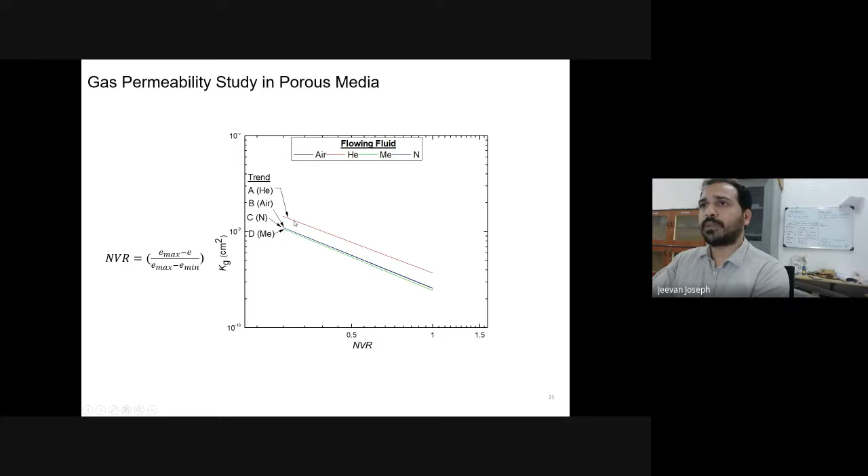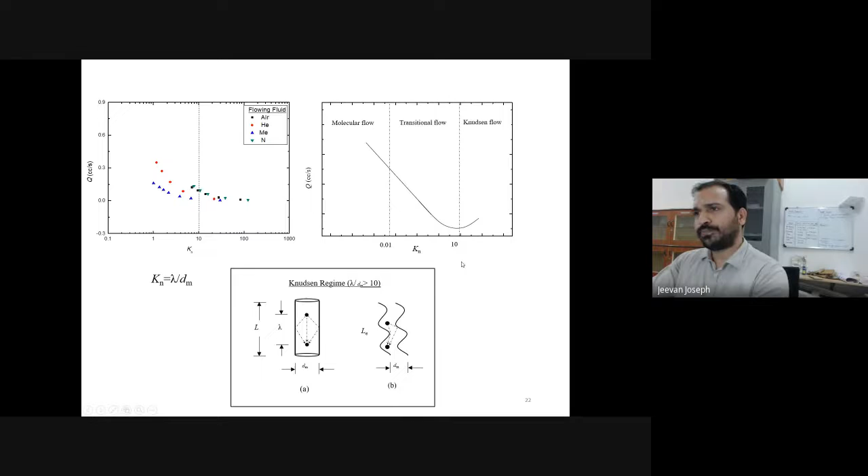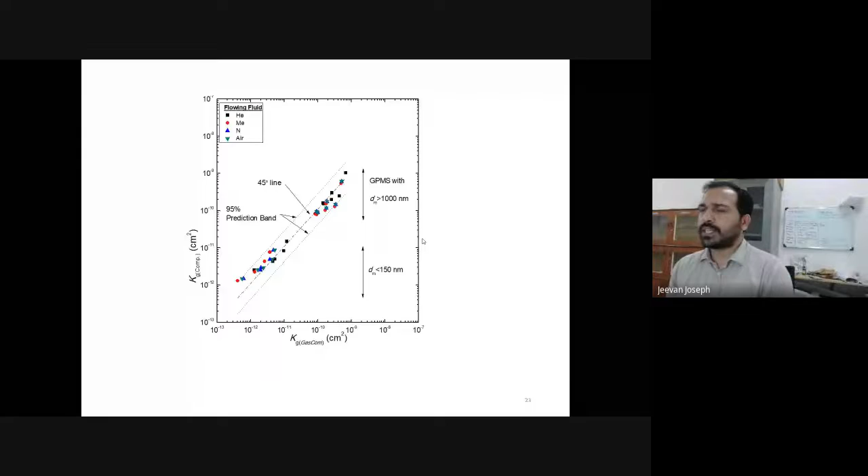Apart from this, I want to share one more method by which you can measure the gas permeability in frozen sediments. In the previous case, we were seeing an equipment which can be equipped for measuring the gas permeability under normal temperature conditions. Whereas in frozen sediments also, we can think of creating flow devices.

And finally, you can perform gas permeability experiments through this sample at different temperature conditions. In most cases, if there is moisture present inside the system, that will undergo phase change.

For example, if it is having a saturation of 20% or 40%, this water will undergo phase transformation. Once it undergoes phase transformation, there is an increase in volume, because the water phase changes to ice, and the density of ice is close to 0.91 grams per centimeter cube. So there will be an increment in volume, which will reduce the pathway available for gas transport to happen.

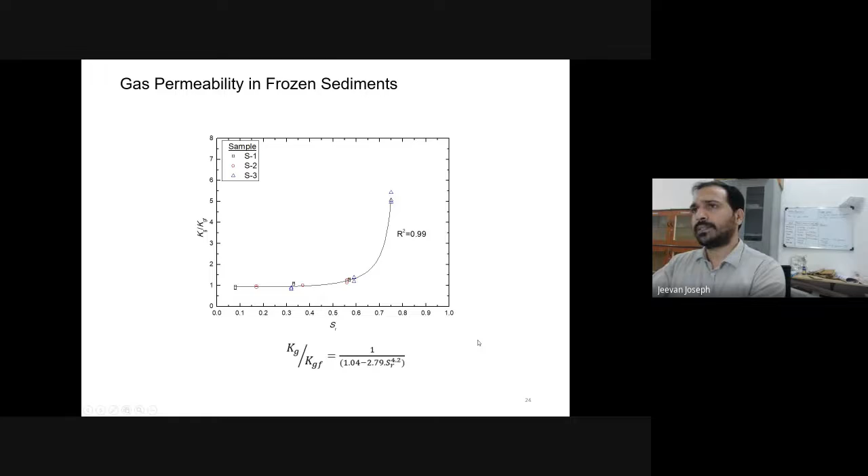To conclude the various aspects we have discussed so far: the first and foremost thing is, the easiest way to establish the intrinsic permeability of a porous media is by doing gas flow studies. In the conventional hydraulic conductivity method, we have to ensure saturation, have provisions for applying back pressures, and if it is clay and such media, we have to wait for a longer time.

Whereas, in order to get the intrinsic permeability of a porous media, you can immediately use gas flow because its saturation can be ensured pretty easily. At the same time, gases can go through even the finer pores available in such systems. So defining the intrinsic permeability using gas flow would be the ideal solution for the majority of gases and the majority of porous media.

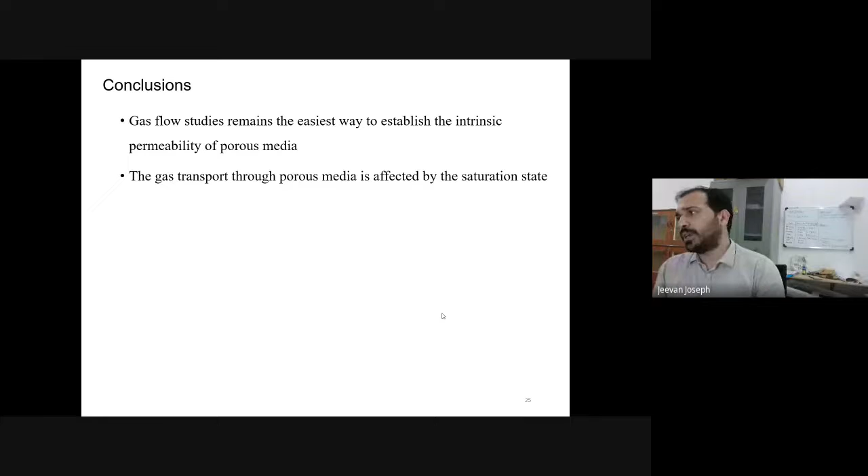But at the same time, it will be influenced by the saturation state, because as I have mentioned, there will be layers of water surrounding the soil grains, which will affect the flow of gases and the pathway available. So that has to be ensured once you are creating such a sample state.

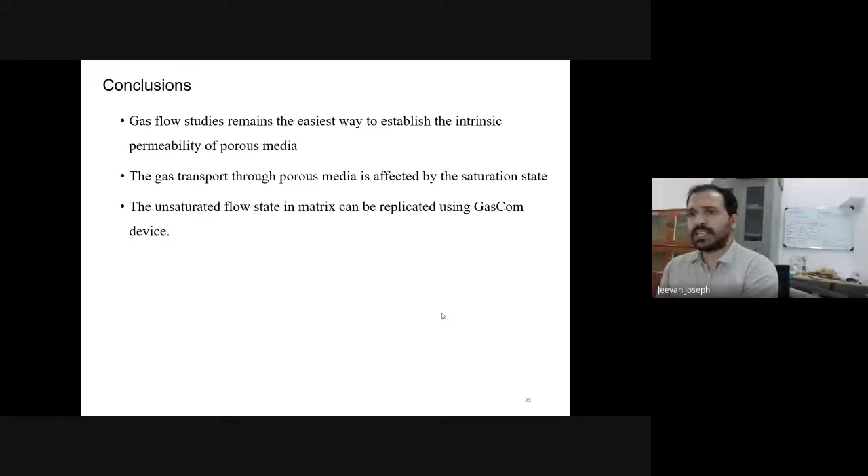Similarly, the setup I have demonstrated to you is a simple setup which can be utilized even for measuring the unsaturated flow state of gases inside a porous media, as well as the MIP technique, which can be adopted for describing the flow phenomena that is happening.

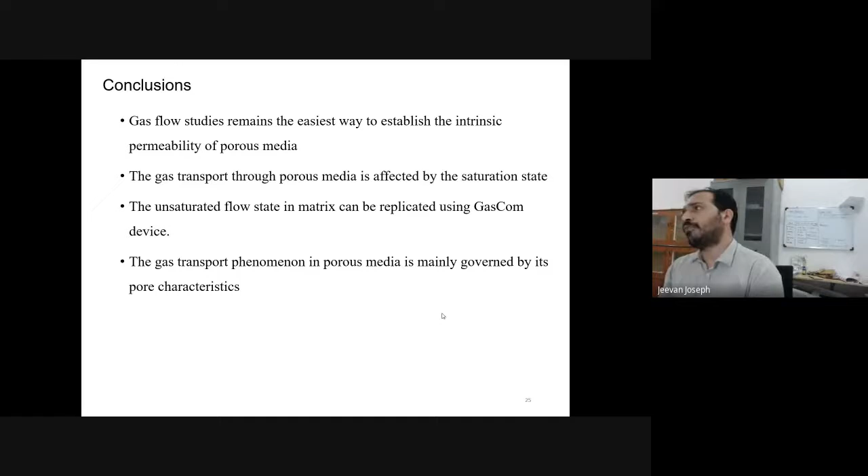As I have mentioned, the flow is always governed by the type of pores generated in such a system. It can be the diameter of the pores, the tortuosity. So there are plenty of factors that affect the flow of gases which is likely to happen.

Apart from that, it will change with the type of gases, because the lambda value, which is nothing other than the mean free path, is gas dependent. Depending upon the various gases, the lambda value will keep on changing, so the Knudsen regime will keep on changing for different types of gases. So gas permeability measurements at lower diameter pores have to be evaluated with the type of gas used for the study.

Now there are a lot of other areas which can be focused on related to these gas transport studies. First of all, the coupled flow studies. In the majority of cases, we encounter a situation in which two fluids, like gas as well as liquid, will be flowing through a porous media at the same time. So there is scope for learning coupled flow studies in porous media as a matrix.

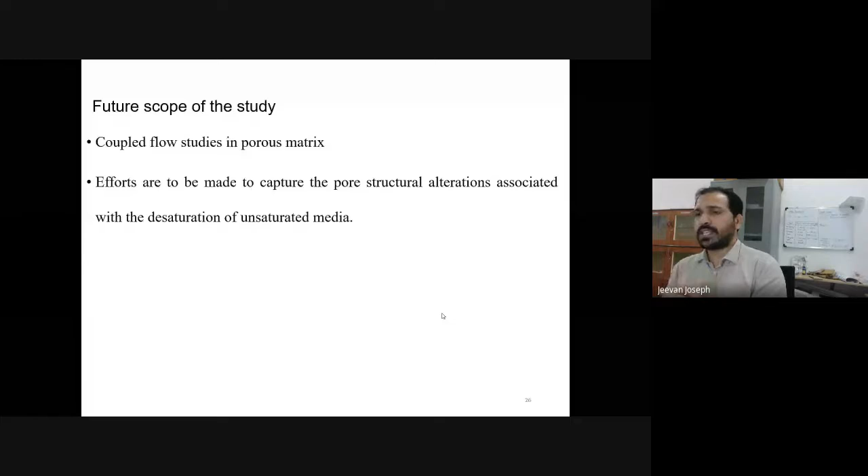Similarly, there are people investigating research ideas on how exactly pore structural alterations or the desaturation that happens in an unsaturated media varies the gas transport happening inside the system. Whatever I have discussed so far is basically under normal temperature conditions as well as frozen conditions.

One of my students is also attempting gas permeability studies on porous media under elevated temperature conditions, because in nuclear waste repositories, in the liner system provided, the heat evolved from the nuclear waste causes desaturation to happen. This is truly a complex behavior which is undergoing, and we are trying to replicate the same phenomena in laboratory conditions to understand how exactly under elevated conditions the gas permeability is varying.

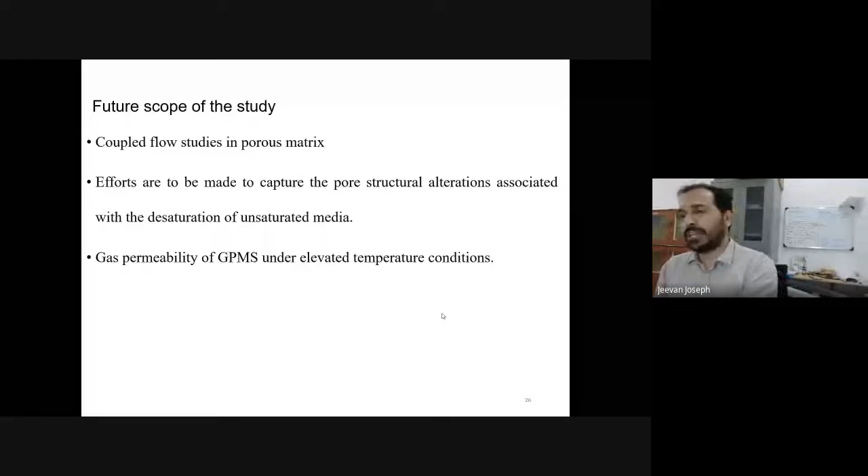Along with the gases used for the study, the vapor phase of water will also influence it, and similarly the mixture of gases. So far in our discussions I have mentioned pure gases being utilized for measurements. Whereas actually, when we have a mixture of gases, in real time like in a landfill we will encounter H2S, CO2, CO, and plenty of other gases, including trace gases. In such cases, measuring the gas permeability for mixtures will be absolutely necessary rather than targeting pure gases. So this is, in a nutshell, where this area is heading.

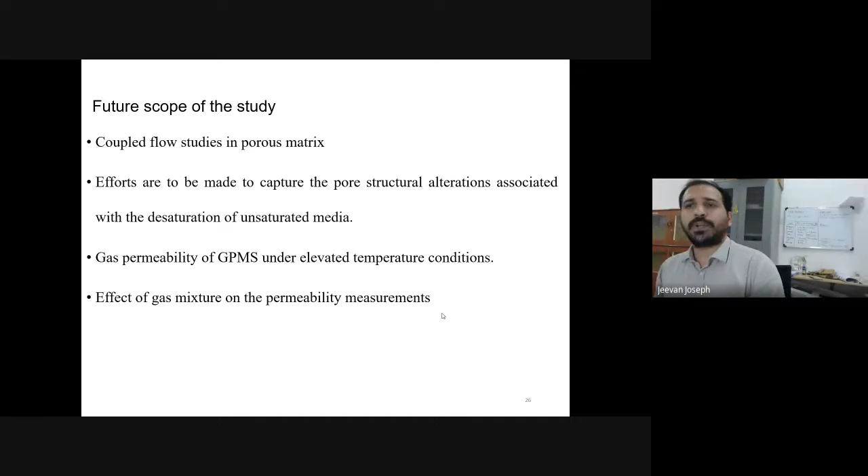There is a lot of scope working in this particular domain. There are plenty of projects being given by ONGC for computing methane gas transport through sediments. Similarly, there are plenty of projects awarded related to liner designs in landfills, taking care of non-leakage conditions for liner systems. Similarly, BRNS is also supporting research funding for liner system designs for deep geological nuclear waste. So there are various ways into which you can think of diverting into this particular area, and the investment needed for measuring these devices is also not so high. That's what I have felt.

With this, I would like to conclude my presentation. Any queries? I am sure I was rushing because I started slightly late, so I had to rush through the slides.

In a nutshell, what I wanted to convey was, it's not about the conventional conductivity which normally geotechnical engineering heads to. It's all about the various fluids that are flowing through the system which have to be evaluated. Depending upon the varying type of fluid, its transport mechanism also varies. That is what I wanted to convey through my presentation.

I would like to hear from you, whether you are interested in hearing more about this particular topic. I'm more than happy to share with you whatever I know.